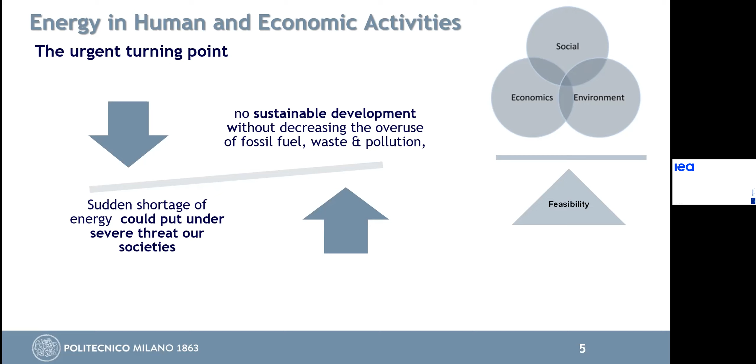And this is one side of the coin. But the other side of the coin says also, and I think you are strongly aware of this point, that a sudden shortage of energy could put societal development under threat. And this is very much true, especially for some developing or emerging regions.

So from the first perspective, the energy and environmental dimension, we know that we cannot further plan our future on infinite resources. We need to make that accountability, and we need to be very much aware that resources are somehow limited. This means we cannot think that our world is large enough to support whatever use of resources we aim to do. We are perfectly aware that this is no longer acceptable.

And indeed, what is happening at the international level—I have just mentioned here a couple of elements. They do not represent the whole set of policies that are around, but just to mention a couple of them: one is related to the nationally determined contributions.

After the Paris Agreement, referring to the Conference of the Parties 2015 in Paris, all the countries committed their voluntary contribution to climate change. So we are all aware that we have to do our best effort in order to reduce our impact on climate.

More recently, I'm very happy that this was confirmed despite the 2020 emergency. The European Green Deal, which aims at making Europe the first carbon neutral continent by 2050, was launched before the COVID pandemic, at the end of 2019. We are really happy that this was confirmed despite the difficult situation we are still living today. The commitment toward the European Green Deal was not stopped, and this is quite important because it will also be one of the bases of the recovery.

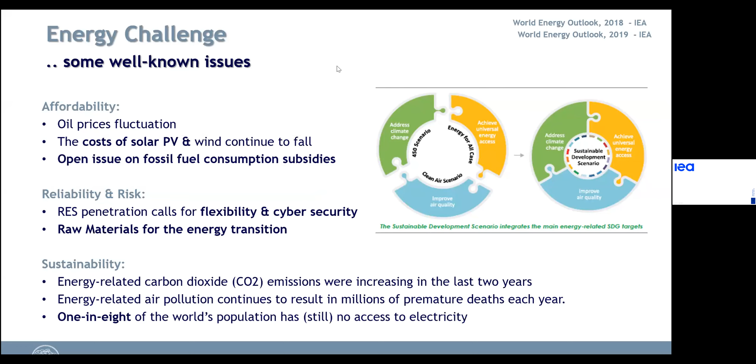This was already a complex world, already a big challenge before the COVID pandemic, and we were aware of some issues related to affordability, reliability and risk, but also to sustainability. The big challenges behind the sustainable development scenario were mostly to try to assure universal access, but also to do our energy transition, or the development of the energy sector, in full compliance with climate change, without forgetting the other very important part of pollution, which is improving air quality.

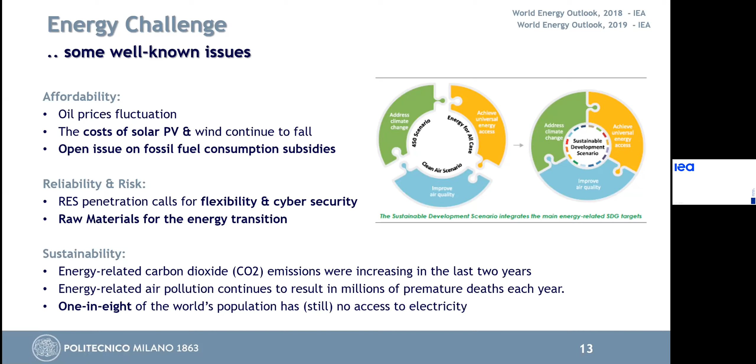So the challenge was already a challenge before the COVID pandemic. And then we experienced this kind of shock. All the challenges have been hampered by what has happened. And why am I saying that? I'm saying that because we have understood during...

the COVID-19 pandemic, which is still with us today, despite probably all of our hypotheses done one year ago, that on one side, the energy sector has really played a vital role in supporting healthcare, in supporting remote working, but also in supporting that minimum of social life that we still need to have. Without energy, we could not have been here together today in this kind of action.

But on the other side, we see that the economic crisis happening along with the stop of many industrial sectors is probably diverting governmental funds to other, more direct priorities, like healthcare or the financial support that needs to be given to industries that have been obliged to stop.

So we understand how relevant the energy sector is, but on the other side, probably we are in a condition of having less investment in the energy sector, because money is needed for other, let's say, top priority items due to the pandemic effect.

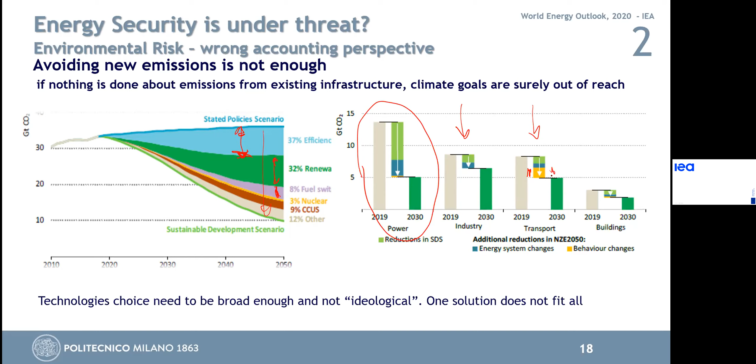And it's quite interesting to see this yellow part which appears in the transportation sector, because we start to see that there will be a role for behavioral change, especially in some specific sectors.

And the last risk that we want to underline is a kind of social risk. How in line are we with a just energy transition? We need to push the energy transition, but it has to be a just energy transition, which means a transition that will not further increase the gap between the rich and the poor, whether individuals, groups of people, or regions.

We have to push an energy transition that will try to be more equitable at the global level. And we know that, unfortunately, during the COVID pandemic, the most critical situation is allocated to some of the most vulnerable regions. So we know that in each country, the categories most affected by what has happened are the categories in critical condition from the economic perspective.

But when we look at this problem at the global level, we have seen that the regions which probably experienced the more relevant problems with the energy change due to the COVID pandemic are the regions that are already developing regions, or still need to develop their energy scenario. And within this scenario, it's very important to understand what will be the role of Africa. For a number of reasons, Africa needs a sustainable energy system in order to boost economic growth and the quality of life for the people.

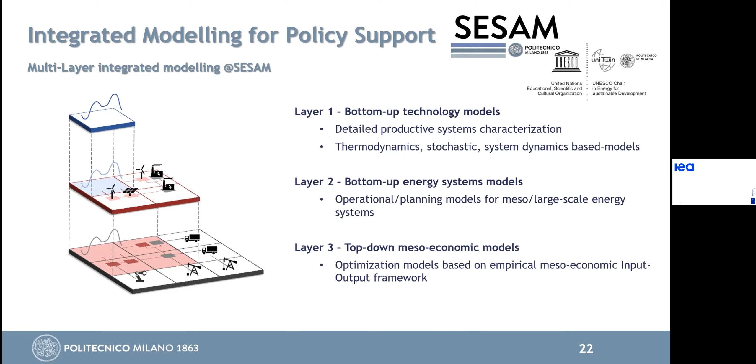So we have these 3 layers that I'm trying to deepen a little bit, but just shortly. The first one requires a lot of knowledge on the technological development, on the characterization of the specific technology. We can model components, processes, and also products within a specific supply chain. This means that in this way, we are able to add slowly, or fast, it depends, each new technology that may come to be an opportunity. We are not stuck to use old technology.

Then in this layer, we also try to detail the energy demand. And we try to detail the energy demand by using a bottom-up approach, which tries sometimes also to include behavioral effects, because we know that the demand may change according to the change in the perspective of the people, the behavioral change. So, for instance, what will happen after the COVID pandemic in terms of transportation? Once we will be able to be back without the lockdown, are we going to use transport in the same ways as we did before, or will there be any change in people's behavior? So we try to include all these elements of social behavior by approaching the creation of the demand using, for instance, some socioeconomic dynamics tools.

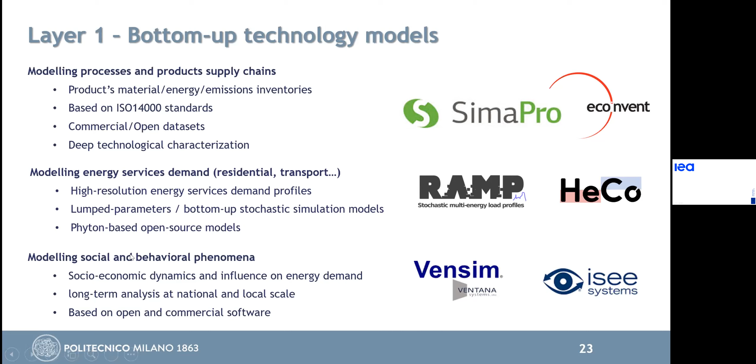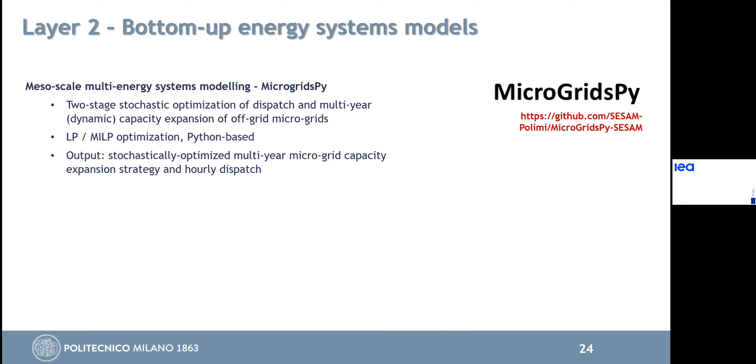The second layer is the layer in which we put all the technology together. We use the demand that we have developed in order to simulate, but also in order to do planning for the energy system. And we mostly use two different approaches. One is more related to mesoscale multi-energy system modeling like MicroGridsPy, which gives us an opportunity to make a linear optimization or a mixed integer optimization of microgrids thought for off-grid solutions.

And the other approach, which is not that different, is using Calliope or OSeMOSYS. I think probably OSeMOSYS has been already introduced to you, in order to optimize whatever it is, the dispatch or the capacity expansion of a national energy system. And we have tools that give us the optimal or the near optimal alternatives, which means not only alternatives based on the least cost, but alternatives based on an ensemble of criteria that might be of relevance for policymakers.

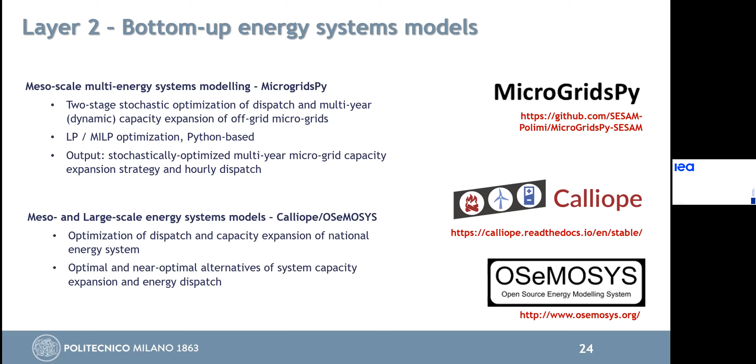And the last layer is the layer in which we say, okay, once I have designed the energy sector given a certain perspective, then I want to see how this is impacting the rest of the economy, the industrial sector. If I have this system with this energy mix, now what does it mean if the industrial sector uses this kind of energy? What are the implications? What are the impacts that we are able to measure in terms of environmental impact, use of resources, overall emission, embedded emission, not only direct emission, use of water, for instance, because there are some energy solutions that are more water demanding or more land demanding.

And so we are able to have an overall environmental impact, not only in terms of CO2 emission or pollutant emission. And we are also able to evaluate other kinds of impact, like the economic impact, the added value that is brought into the sector, as well as job creation that might come with that development. So in this way, we try to integrate our deep technical engineering-based knowledge with a more broad knowledge, which tries to give the impact over the whole economy in terms of environmental parameters and in terms of economic parameters. We try to answer what were the 4 points that we have already underlined. And in this way, we are also able to see the impact of our technological development, energy modeling, on the sustainable development goals.

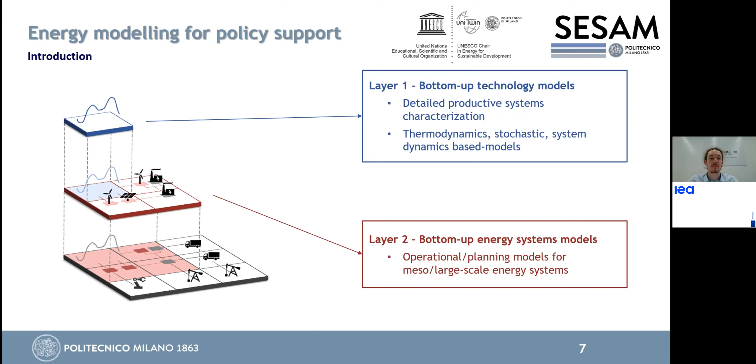But first of all, let's make a brief recap. Probably you already have been through it, but I would like to make some important points. What is energy modeling? Energy modeling is the mathematical representation of an energy system in order to make simulations and assess the impacts of actions and policies to the represented energy system.

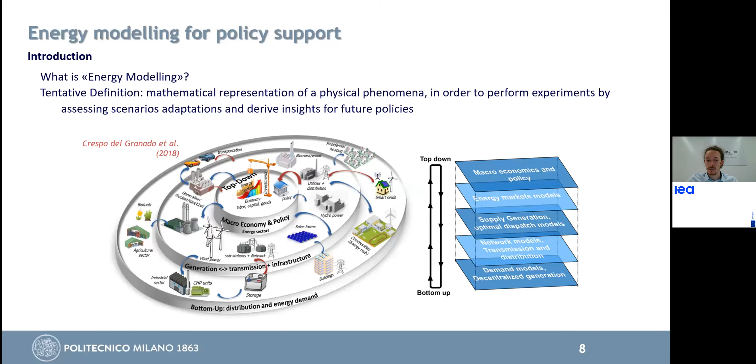Energy models can arrange a very wide range of temporal resolutions and geographical resolutions. Depending on the problem we are facing, we choose the proper energy model. So there is a wide variety of energy models, and depending on the kind of problem I'm facing and the solution I'm looking for, I select one or another energy model.

In particular, today we are going to focus on supply generation and optimal dispatch models. So the output I'm looking for is the optimal sizing of supply technologies and the optimal dispatch of such technologies.

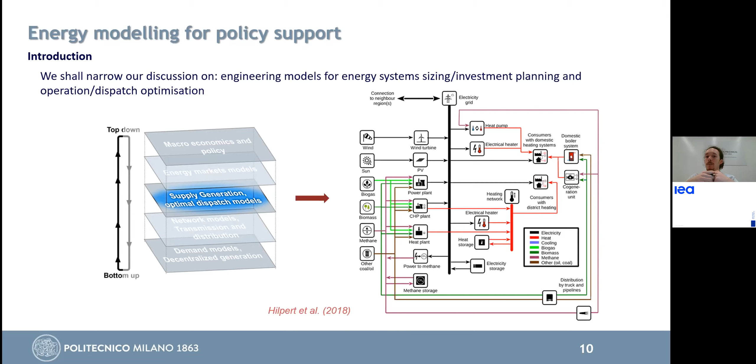A typical, basic energy system model takes as input the demand I want to satisfy, so what do I need this system for? The available renewable energy sources in the area in order to be able to properly size the technologies, the characteristics of the technologies involved, so I know how they will behave, what are their operational, maintenance and investment costs, and all the parameters of my project, such as how many years this technology will be used for, and what is my economical context.

As an output from such kind of models, I expect the number of pieces of technology I have to install, so optimal capacity, how to properly use them, so optimal dispatch strategy, and the costs I'm realistically going to face, investment cost and operation cost, and as a result, the levelized cost of energy of the system.

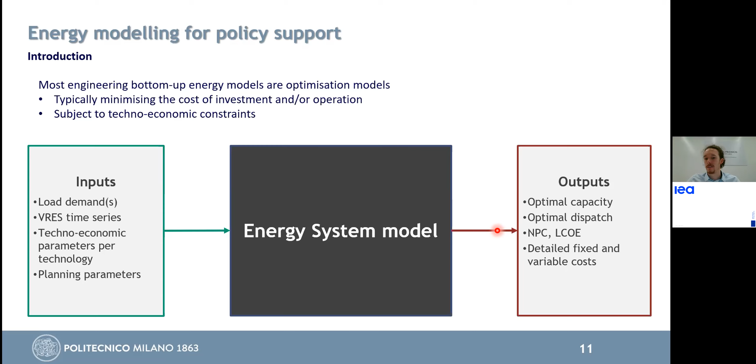When I build an energy model, this example shown here is for a national, or entire country or region, energy system. I assess the existing resources for energy generation. I understand how in my considered system such resources are transformed into electric energy. The electric energy is then passed on to the transmission system and to the distribution system.

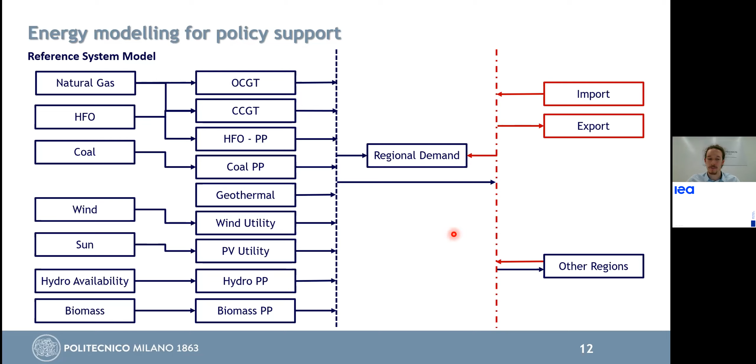The model can be multi-regional, so I can even assess how the region that I'm seeing interacts with other regions by selling and buying electricity to other regions or other countries. But the final goal is always satisfying the demand of every region I'm considering. So this is how I build the model.

But what's behind this curtain of energy modeling? Well, usually when we talk about optimization, it's the satisfaction of an objective function that is usually minimizing the overall costs of my system. So I'm looking for the economically optimal solution to my problem.

But all my system is constrained to physical boundaries of the real system I'm representing. Such boundaries are the energy balance, the power balance, mass balance, because I need to be consistent with the physics of the problem. I have technological constraints: a PV panel will behave in a certain way, a diesel generator will produce energy according to its efficiency and the kind of fuel I'm providing. Then I can consider market constraints, so the more economical source of electricity will have priority above the others, and economical constraints.

So what are the costs of my technologies? In the end, I'm looking for the most economical, the cheaper solution among all the existing solutions. What do I mean by all the existing solutions? Because optimization is finding the minimum or the maximum, since it's minimizing or maximizing a function.

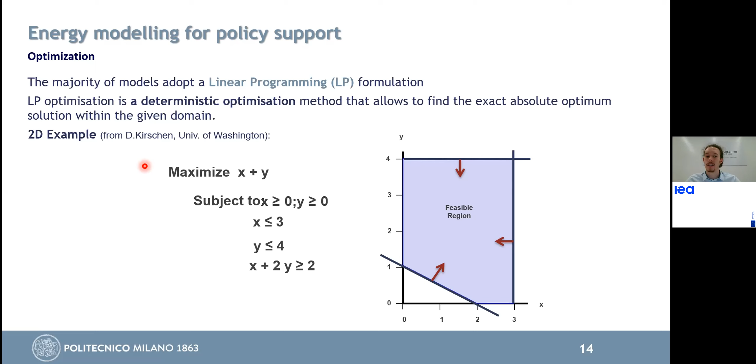So when I take all my constraints, I define my feasible region. All the solutions inside this area are feasible, can actually work and satisfy my problem. But then which one is the optimal? Which one is maximizing, in this case, my objective function? Well, there is a theorem, the Simplex algorithm, that says if I follow the borders of my feasible solution area, I will eventually reach my optimal solution, no matter which direction I'm following.

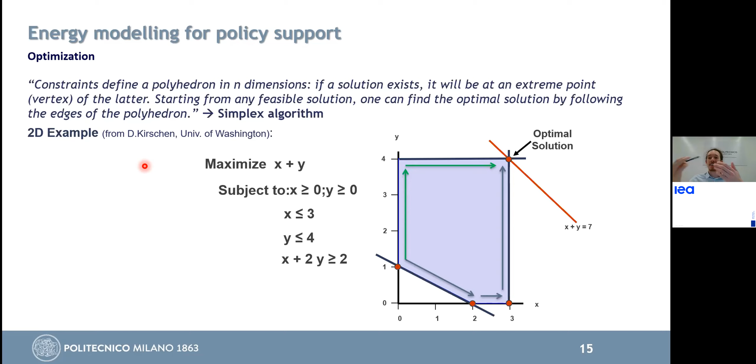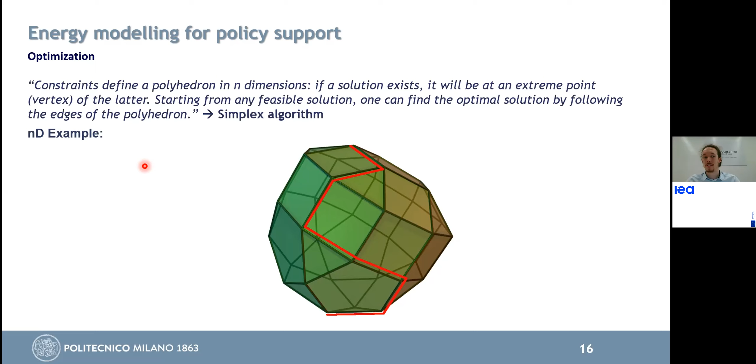This is called linear optimization, and is at the base of every model we make use of in our research group. Now, this is not fundamental, but it was to give you an idea of the mathematics behind an energy model. I have a problem, I make a mathematical representation of the physical model, and through linear optimization, I identify among all the feasible solutions the best one. This is the same example of the Simplex algorithm, but I'm going n-dimensional, because of course all my physical problems consider several dimensions. But now let's go have an overview of the existing and most famous models.

We basically have two categories of models. We have the so-called commercial models, like Markal, Times, Homer, Message, Leap, that are the most used by international agencies and are commercial models. On the other side, there are the open source models, the ones we make use of in our research group. They are more suitable for research purposes because they are completely adjustable to the needs of the modeler.

And the source code of the model is completely open to anybody to see. So anybody can freely download the model, open the model, and see which equations are governing the model, and can even change them according to the needs of the user.

But let's jump a bit more into off-grid energy system modeling. That is the thing I would like to explore more today.

Nicolo, sorry for interrupting. Maybe there is one question that might relate to the slide you just had, on a different type of energy modeling tools, before you deep dive into the off-grid. Maybe if you want to take it now. Okay, I think I will take into account this.

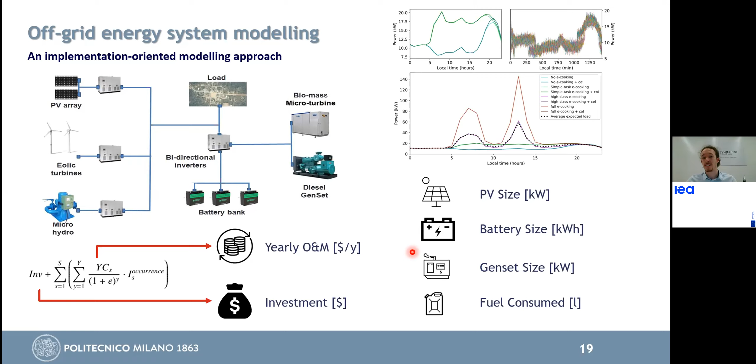But all these processes are around needs of people. We do not optimize technology because we like to bring kilowatts to rural areas. We do it because there are needs of people, of populations, that have to be identified and properly satisfied.

So our entire process of modeling is always based on a very strong stakeholder engagement and needs identification together with the stakeholders, with the population of the village and the most relevant authorities of the country and of the specific village.

Together with them, we formulate scenarios of future demand, existing demand. We try to understand which technologies are more suitable for that particular context.

Then, together with the knowledge of the locally available resources - there are several ways to assess locally available resources, both models online provided by, for example, NASA or other institutions, or you can even meter, register, measure the amount of available resources through instruments on the ground.

We combine such information and we make the optimization of the system. But everything starts with engagement with the population.

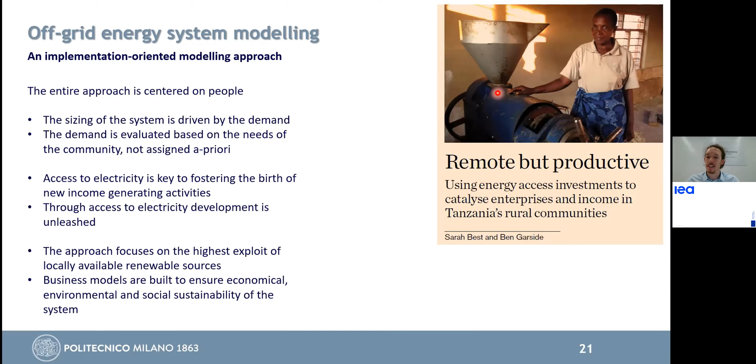And through our models, we help policymakers and international agencies to develop electrification strategies, policies, or even single projects.

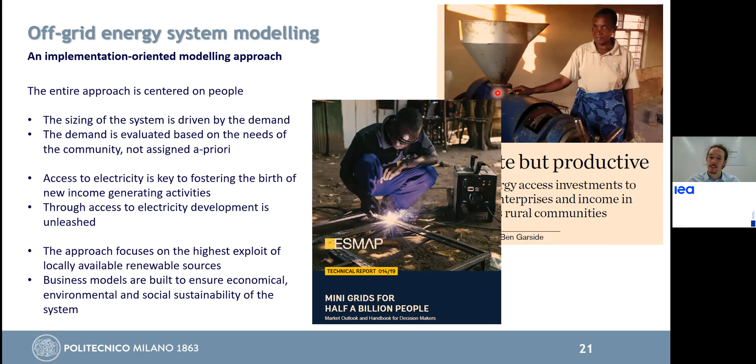Okay, but as has already been asked, how do you assess the load demand? How do you assess the available renewable resources in an area? Because yes, okay, I explained what is the logic of an energy model, but how do we provide the inputs? Or what do you do once you have the optimal capacity?

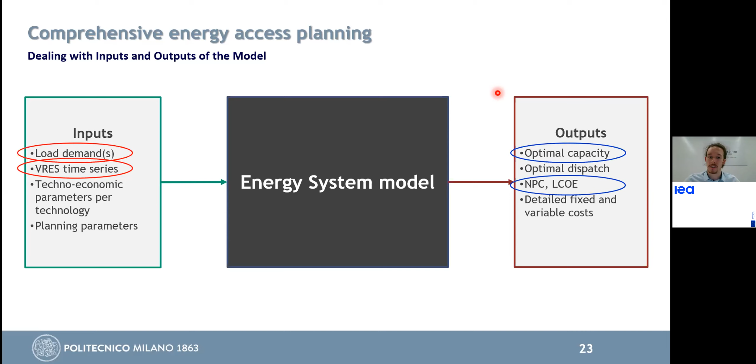This is not just a number. Once you have the optimal capacity, then you have to do something with that. Well, we have developed a strategy called the comprehensive energy access planning that gives a kind of guidelines for deriving my inputs and properly using my outputs.

So as I stressed already, mathematical optimization is not enough. Modeling rural access to electricity needs to follow a path built around energy and needs of people. Mathematical optimization is just a step inside a procedure made of many steps that now we are going to see a bit. The comprehensive energy solution planning aims at seeing exactly this.

I see a question: what are the bases to design an off-grid energy model? Let's see if these steps help you understand what are the bases to design an energy system model. If I did not answer, then you can ask the question again, specifying what you're still missing as information.

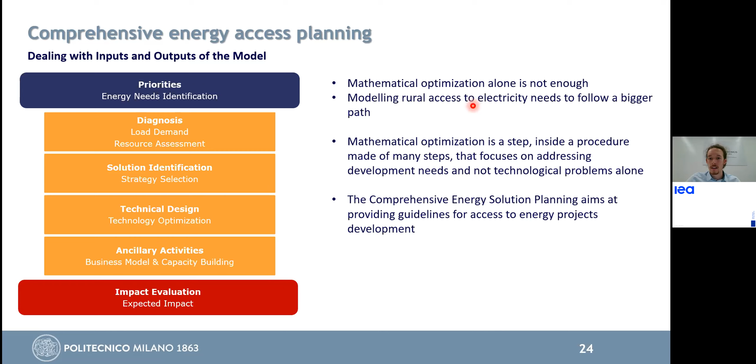First, as I already stressed, we focus on priorities and identification of needs. So we do not care about the number of kilowatts, but we assess the needs, which can range from basic needs such as lighting, up to more complex needs such as productive uses of electricity—businesses that can be developed thanks to energy—and societal needs like education and healthcare. Then we transform such needs into kilowatts.

Alongside that, the second input is the assessment of available resources. How do we do that? We rely on global models, such as NASA models, that give us an idea of available resources through many years of recorded data, modeling future availability. We couple that with on-the-field evaluation of existing resources.

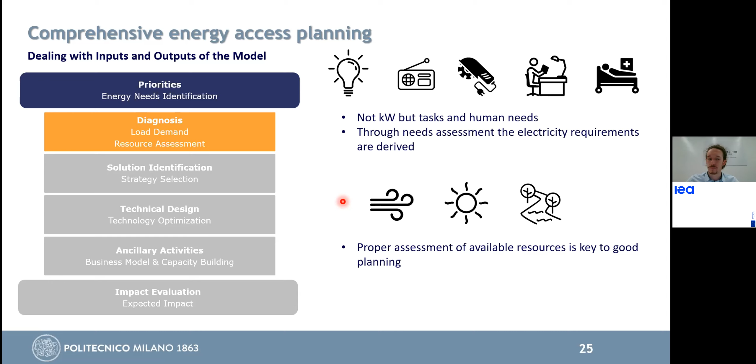So if there is the presence of a river, I will realistically favor building a small hydropower plant for the mini grid, even though in the entire sub-Saharan Africa the sun resource is very abundant. If I have a river, it makes much more sense to use a small hydropower production system. Once I have identified the needs and the available resources, I also have to identify the proper solution, because one solution does not fit all.

The need for a proper strategy is important. So I identify, based on the specific situation, which kind of technology is most suitable—standalone technology, mini grid technology, or grid extension. Once I've identified the most suitable technology, let's say a mini grid, then I perform the mathematical optimization I already presented, and obtain as output, based on the needs, the optimal technological solution for the various options considered.

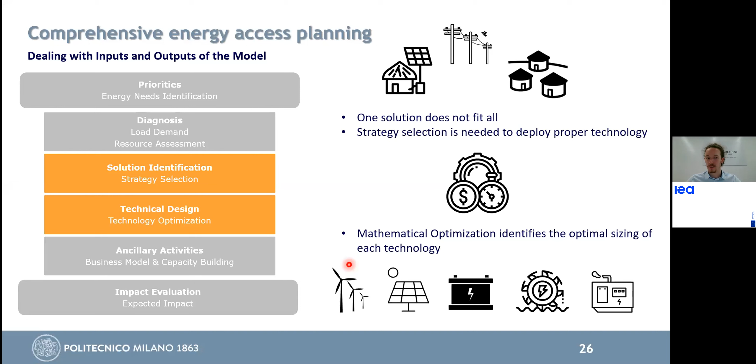Size of each technology and how to properly place them on the ground. Then it's not over, because now I just have numbers that tell me the right sizing of the technologies involved. With that, I can start to develop proper business models to deploy the necessary ancillary activities.

We have understood through years of research that energy itself is not sufficient to unleash development. We also need to provide ancillary services to the community, for example access to microcredit or help to develop income generating activities. All these activities, together with the technology for access to electricity itself, will foster development in the area.

Once I have identified the proper system sizing in all terms, I evaluate the supposed impact of my project and ask myself: did I address all the needs that I had identified? This is the process we have developed for proper energy system and energy access planning. So it's not just technology—technology is one step in a bigger framework.

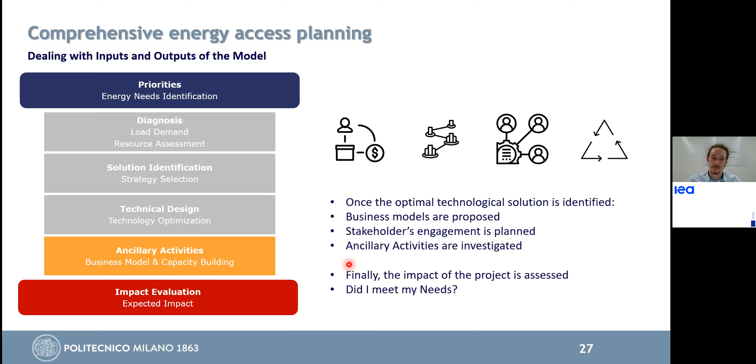In this case, we also considered energy for cooking, because we wanted to make a more comprehensive approach, not only electricity—well, it was electricity as well, since we considered electric cooking. So we asked ourselves: what would happen if electric cooking technology also started to enter the village? How would the system react?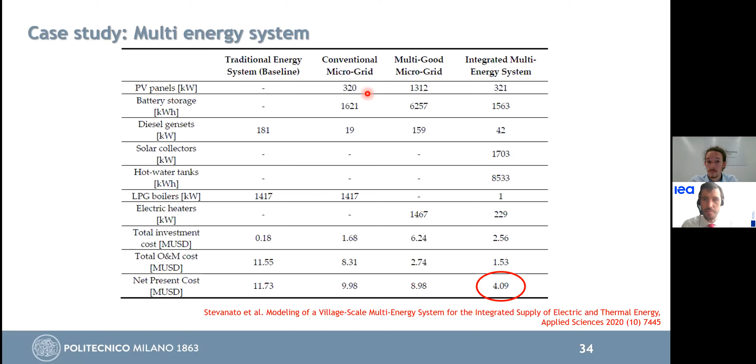Maybe, Nicolo, one quick question from me on the last slide you were showing. Can you just detail a bit what the integrated multi-energy system includes? I can see there are different types of electricity generation, but also other equipment to capture energy, storage. Can you describe a bit more the entire ecosystem? Okay, yes, thank you for the question.

What we did was understanding that electricity is just one of the different energy needs of a community. So we wanted to explore the possibility to take into consideration different energy needs and see the integration of the two systems that are usually separated. So I have a boiler for my hot water and I have a generator for my electricity. But what if I make the two systems interact? So here you can see how we have the standard mini-grid in black: PV, battery bank, diesel generator, the electric load, so my need for electricity.

But on the other hand, I have solar collectors, the ones you can see here, and LPG boilers, so the standard boilers for domestic hot water. Solar collectors make use of a tank for storing hot energy. But what if I put inside this tank an electric resistance that can be powered by the electric system? So in this way, if I have an abundance of electric energy, I can store part of my energy in the form of hot water instead of the battery bank, and then use during the night the extra energy that I have stored, saving gas from the boiler.

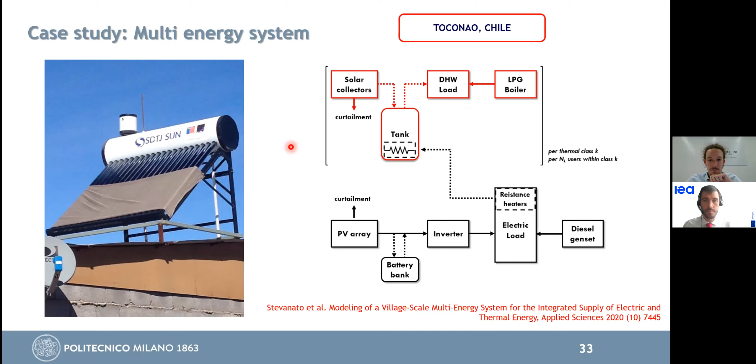Stochastic models are just a way to take into consideration uncertainty, because when we model future scenarios, future evolutions of demand, we do not know what is going to happen. So we might fall into the risk of sizing a system for a particular scenario that I think is the most probable, but then I could find myself in another situation and my system is not optimal or even dangerously wrong for that new situation I did not foresee.

Through stochastic optimization, I can say, okay, I'm not looking for the perfect solution for just one case, but I will take into consideration different possible futures and design a system that will behave in the best way possible for all of them. So it's not the best for just one, but it's the best way I can deal with whatever situation I'm going to face.

So it's a way to be ready for uncertainties. I hope this answered the question. Feel free to ask again if I wasn't clear enough.

Still, I'm not clear on mass balance. It's a matter of being consistent with the physics. If I am modeling a hydropower dam, then I have to characterize my model in terms of the water that is entering the dam is then also exiting the dam. I cannot have water that disappears or appears, because we are building mathematical models. Mathematics do not know what water is.

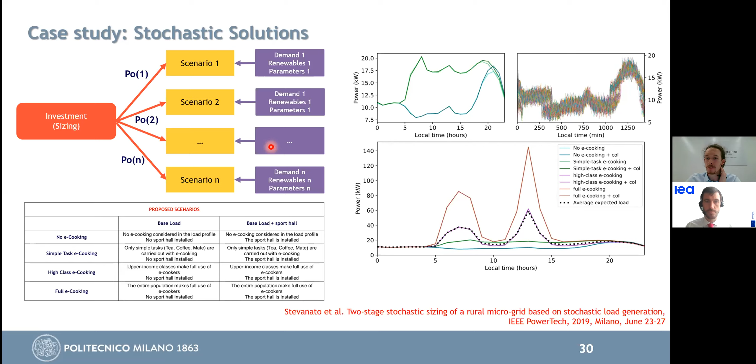And how about the dynamics of the system? Do you consider it in your model? In the case of the multi-year, yes. We considered a dynamic evolution of the load. So we consider 20 years and every single hour throughout the 20 years, with the dynamic evolution of the load and the possibility to invest in different moments of my project. So as you can see from here, I have these 4 scenarios.

Scenario 4 is the case when I invest in different moments. My model can decide to delay the installation of a part of the technology to future moments. So in this case, it's dynamic. In other cases, we are just static over 1 year, for example, and we size a system over the supposed energy consumption of a year and then project it to 20 years. So we do both, depending on the needs, on the situation we are facing.

Can you share something about LEAP? I have to say I'm no expert on LEAP. I have never used it. I know it's a very fully fledged model. A lot of agencies and researchers make use of it. It's particularly suitable for very big geographical resolutions, so you can consider entire continents, if not the entire global situation, with LEAP. And it's designed for very long-term scenarios, up to 50 years.

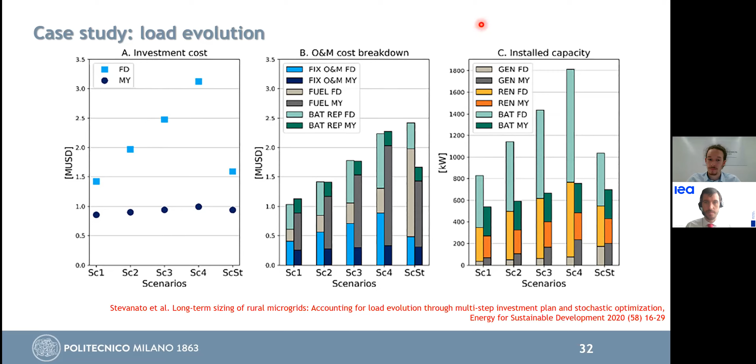But the LEAP model is not my expertise. I can suggest for sure some literature to deepen the knowledge on LEAP. I can pass to Arnaud some references and he will share them. Also here, you already have an idea of some of the references I used to build this presentation.

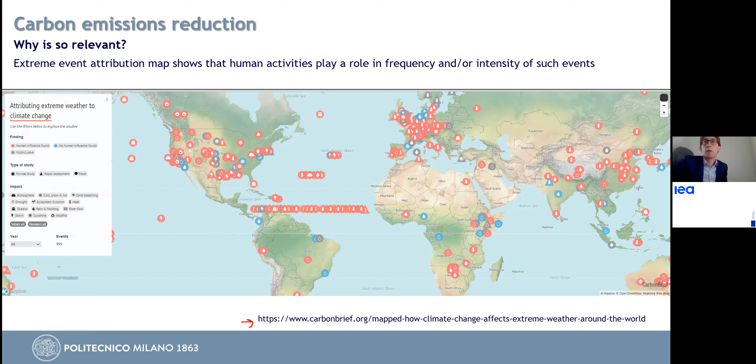But let's try to provide the magnitude of the problem we are trying to resolve. What happened in the last year is something we didn't have so far, and it can give us exactly the idea of the effort we are trying to make. These data are taken from this publication, which may now be updated, and we are going to see the updated values. But more or less, we can say that in 2020 we had a reduction of greenhouse gas emissions of around 4.5%. That is more or less the reduction we should have every year if we want to meet the 1.5 emission reduction goal, the pathway that according to climate models should bring us to just an increase of 1.5 degrees.

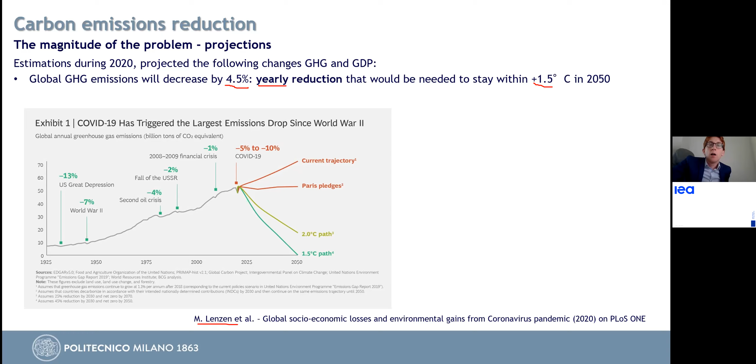In 2050, sorry. So we had this reduction, which basically came out of a pandemic situation. But on the other side, we also had a reduction in GDP, and we tried to assess this reduction, and it is more or less equivalent to a reduction of GDP of around the size of the German economy. This is just to give an idea. But as we are going to see, this is not the only way to reduce emissions.

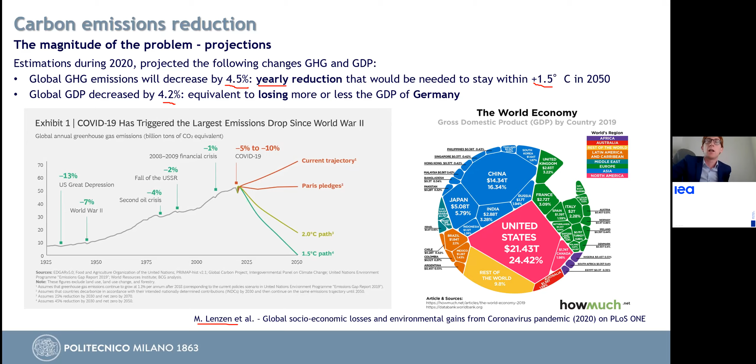This is something that occurred, and we have seen a reduction. But this is again helping in having an idea of the numbers around. Actually, we have an update in these values, as we are going to see, and I also see already that Arnaud is providing updated data on this.

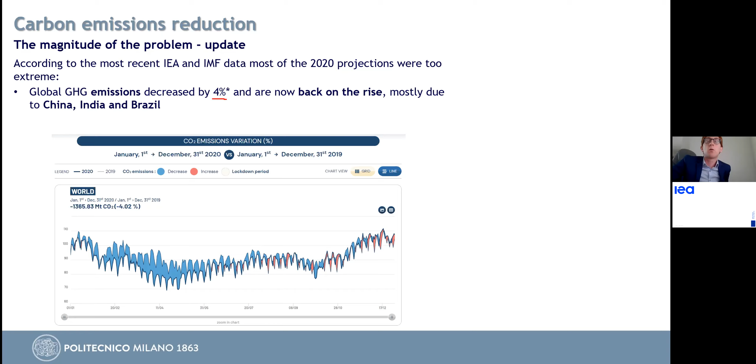Here I'm presenting the data from a website that is monitoring CO2 emission live, let's say, and here you can see the difference from year to year. And here I'm talking about a reduction of 4% because actually we are not considering emission from international aviation. So these are just taking into account the emission that took place in different regions.

But from the GDP point of view, actually, we were more pessimistic during 2020, and the reduction is actually less than the one reported in the previous study.

Now IMF is, as always, updating these values in terms of projection and estimates. But in general, as we can see, there is a lot of difference in GDP reductions. That depends on geography and also on estimates, but this is the main reason. And again, this is the link to the website.

Once we share the material, you can have access. Here I'm just reporting the difference that is related to international aviation. So 4% without considering international aviation, and more or less, if I remember well, very close to the number that Arnaud is reporting in the chat. So for 5.5, more or less.

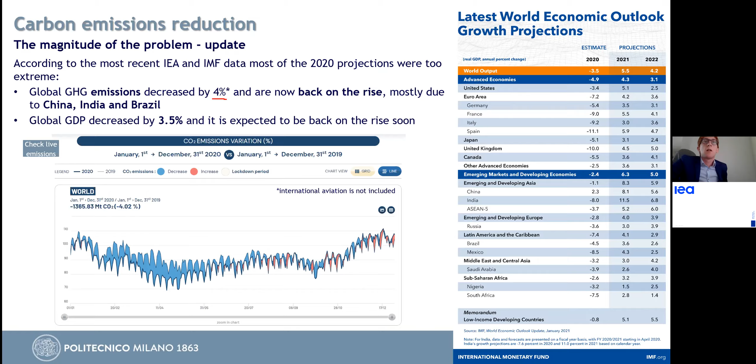These are numbers that are still being updated, let's say. So we have seen what could happen only considering the changing consumption patterns. Actually, we had a reduction that is due to something that was exogenous, but actually we think in general, as engineers, that there are many other ways to reduce emission, and actually we should think about changing technology for reducing emissions.

I see a raised hand, so I maybe take the opportunity to give the floor to Asefa. So please, Asefa, if you have something to say on this, I think you should unmute yourself. Okay, I cannot hear you, Asefa, but maybe we can have some other occasion later on.

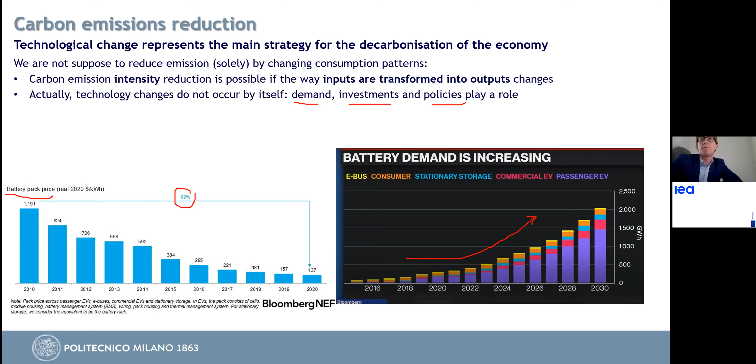But what's the force behind this reduction is probably a very important increase in demand in the future. That is, again, brought by also policy, because this is going to be the case when we are going to move, as it seems, towards the developed world, let's say in Europe and the USA, by moving to electric vehicles. But again, just to give another example, which is related directly to electricity production, there are also very important learning by doing effects that can be observed in the electricity sector.

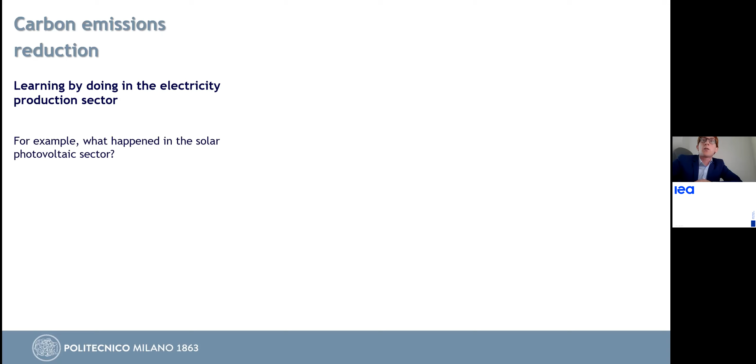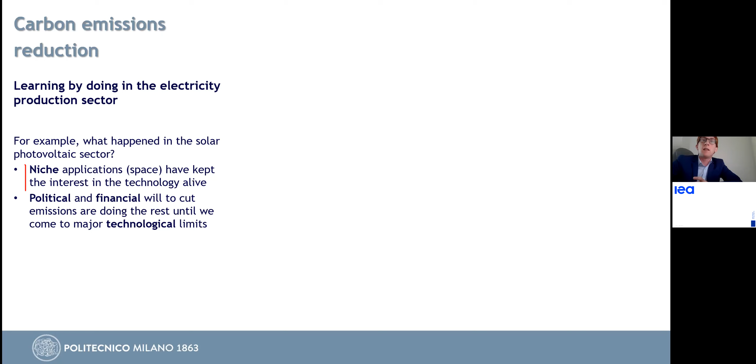Let's see the photovoltaic. We had a lot of time using photovoltaic only for niche applications such as spaceships. But thanks to political will and financial will to move and update the electricity system, we are now seeing a very important learning curve. In particular for photovoltaic, this is very, very steep. This is taken from a divulgative article from Our World in Data that is reporting scientific evidence for this decrease.

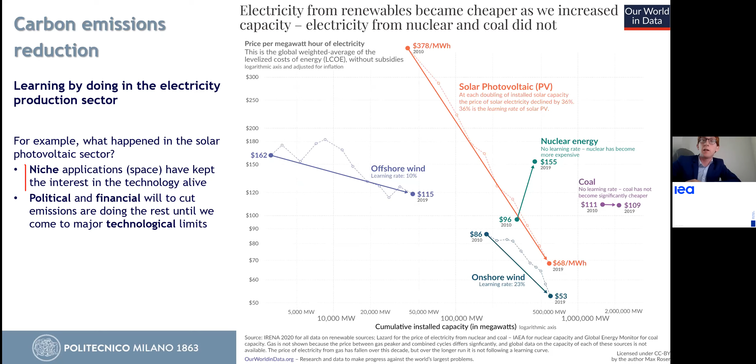So we have seen the carbon emission reduction problem, different strategies related to technology and economic patterns. Industrial ecology is actually the science that we are going to put on the table to try to address this issue. But what is industrial ecology? Industrial ecology is the science that studies socioeconomic metabolism.

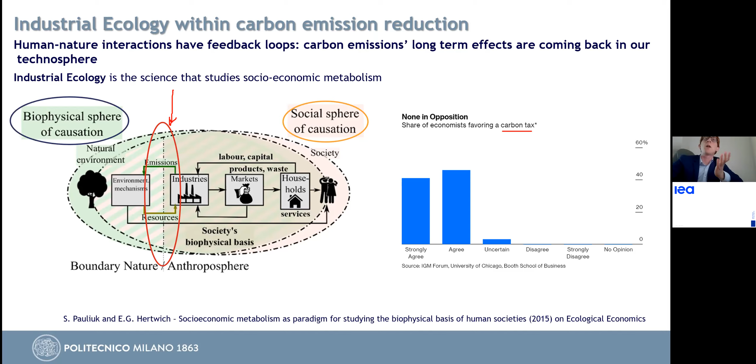But the first point that I want to make is that if we ask economists, we find a lot of agreement in the usefulness of carbon taxes. Most economists agree that it would be a good idea to address the problem of reduction of emissions. But okay, let's put the price on carbon. We see that it's a good idea. But what is the fair price of carbon? We talk about fair price of carbon in terms of social cost of carbon also. And we're going to see that may depend on many things.

It depends on the shared socioeconomic pathways, basically how demography and economic growth can influence future emissions. From the other side, also the concentration pathway. So with the same level of development in terms of economy and demography, how can we have an impact on the carbon intensity? So having the same development with less emission.

And also it depends a lot on the damage function that we assume. Not only this, also on the discount rate we assume. So basically how we value time. How important is it to have a damage today versus a damage in 10 years, for example. This is very important, also very difficult to understand and determine. And also that depends a lot on countries, basically because different countries can have different expected effects in the future, but also different needs today.

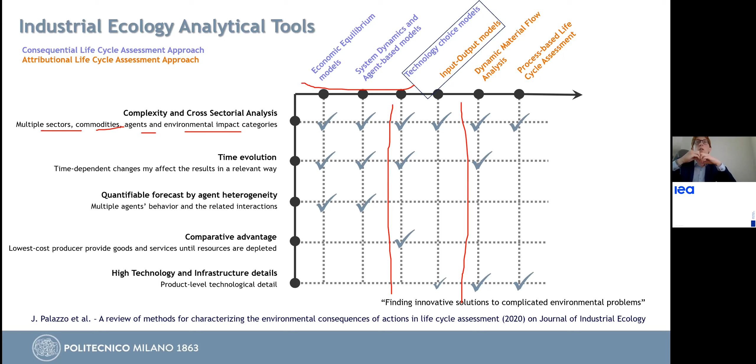But we are going to see, because our analysis from today will be focused on input-output models together with technology choice models. What do I mean? Now we are going into the section devoted to a brief explanation of the idea behind input-output analysis.

And I would like to start from some historical hints. This man is Vassily Leontief, considered the father of input-output analysis. He took a degree in Berlin and then studied in England. Then he moved - he worked in the USSR - and then he moved to the USA. So he had a very, very multicultural background.

He moved to the USA in the 1930s, and he was trying to answer questions from politicians about what we are going to need if we are going to increase the production of all the material that is needed, for example, for a war. This is actually a very difficult question, particularly in those times.

In order to answer the question, he developed what is still remembered as the first input-output table for the USA, and he won the Nobel Prize in Economics for this. Actually, today all the GDPs, all the gross domestic products, are computed from input-output tables. So this had a very important impact.

But what are the assumptions behind input-output tables, and by consequence also behind input-output models, the technology choice models that use input-output data? That is the case of the case study that I'm going to explain to you.

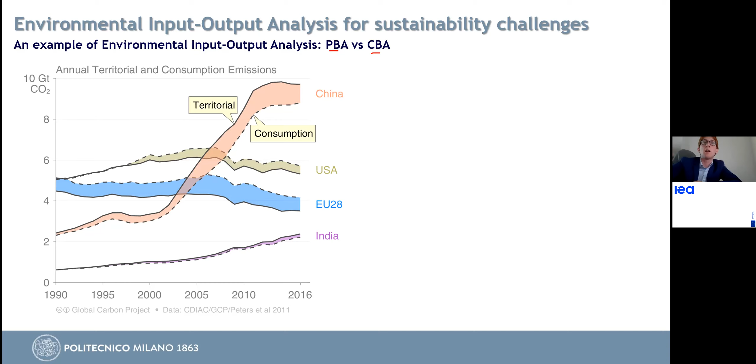So moving to CO2, this is the picture we are looking at today, distinguishing between two different approaches. Some of you this morning asked what the best model is to compute CO2 emissions, and maybe a very important part of the question and the answer is how do you attribute responsibility?

There are actually at least two different mechanisms. The first is territorial or production-based accounting, taking into account all the emissions that take place within the country. This is the idea behind the ETS scheme. On the other side, we can have consumption-based accounting, meaning that countries are responsible for the CO2 emissions released all over the world to produce what they consume.

And here you can see the difference. For example, in the case of China, we have a lot of emissions, but if you consider the consumption-based approach, you have an important negative difference. Europe is the opposite, because we are producing maybe less, but then we are importing a lot of products from other countries outside Europe.

This can determine the so-called carbon leakage, which introduces our case study that will conclude my presentation. There can be carbon leakage because if you increase the price of CO2 emissions in a certain jurisdiction, such as Europe, you can have the effect of importing more from outside because maybe it's cheaper, but you are not sure that the emissions released in other countries are as low as what you could provide in Europe in this example.